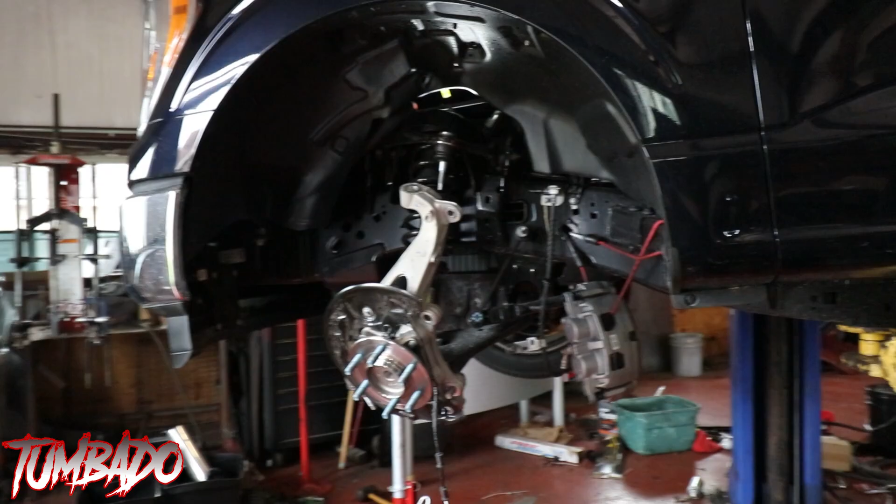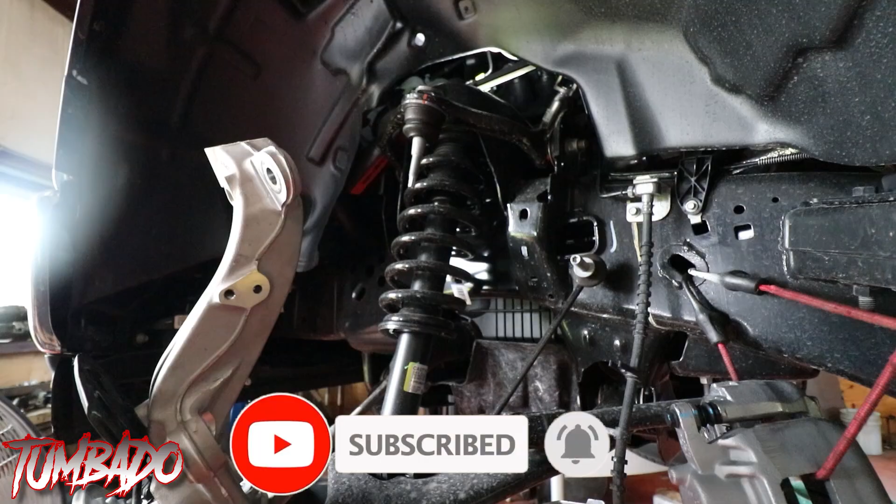So we started working on the front already, started tearing some of the stuff apart. I don't have any of the parts on here just yet, but just a quick reference on these newer style Fords: we have your spindle and hub, bottom ball joint, upper ball joint, stock spring, stock strut, upper control arm, lower control arm.

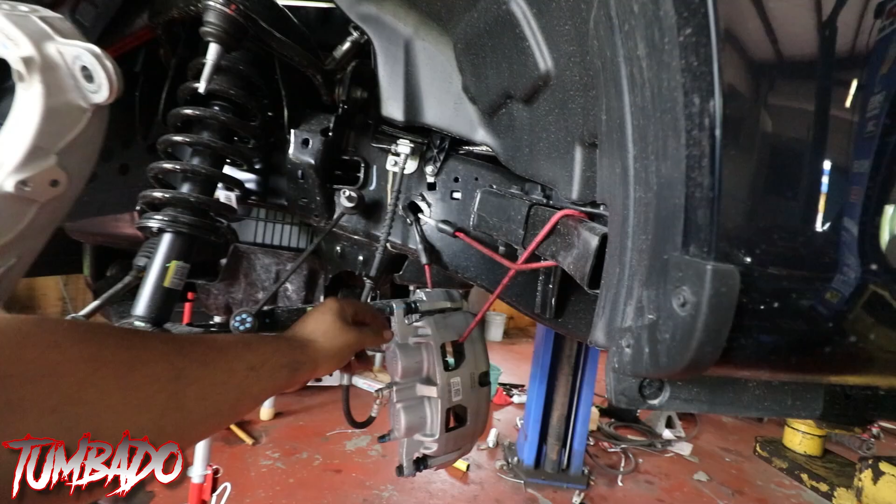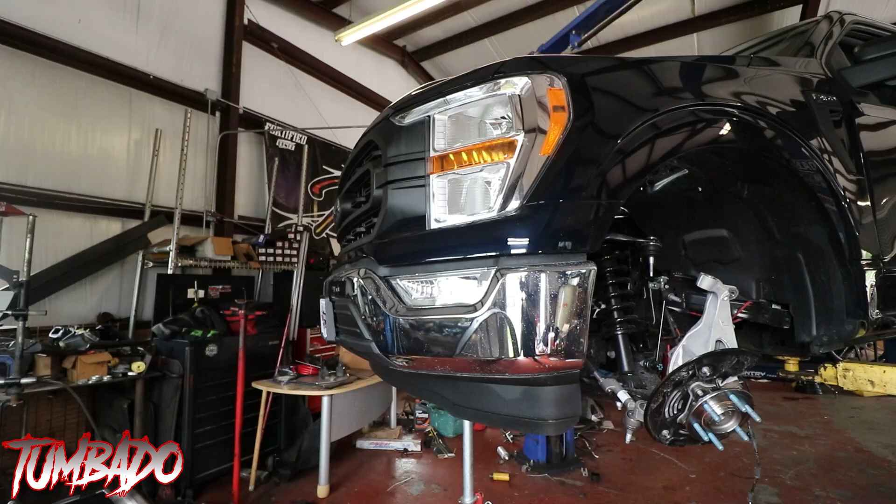I'm going to show you guys what it's consisting of, so you guys can get an idea of when you order that kit. So this is pretty much what the upper and lower control arms look like from the NS kit. We have your driver side, passenger side, the ball joints, the fittings and hardware for the ball joints, and Loctite as well.

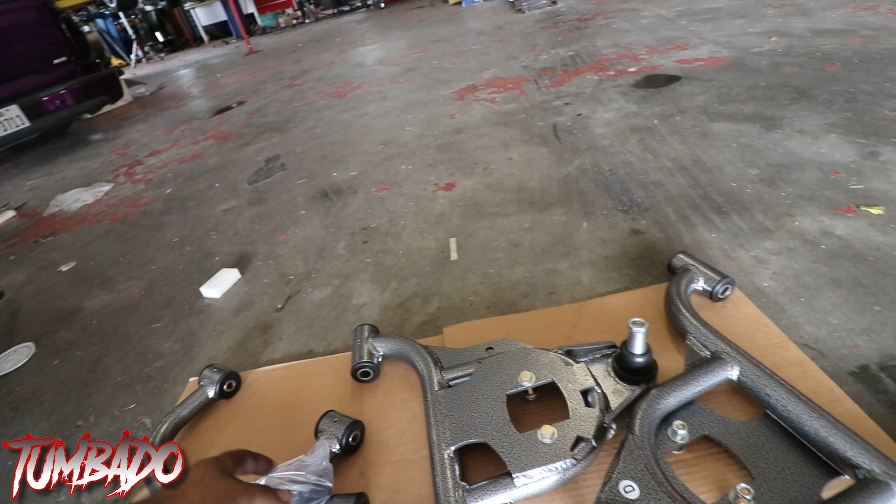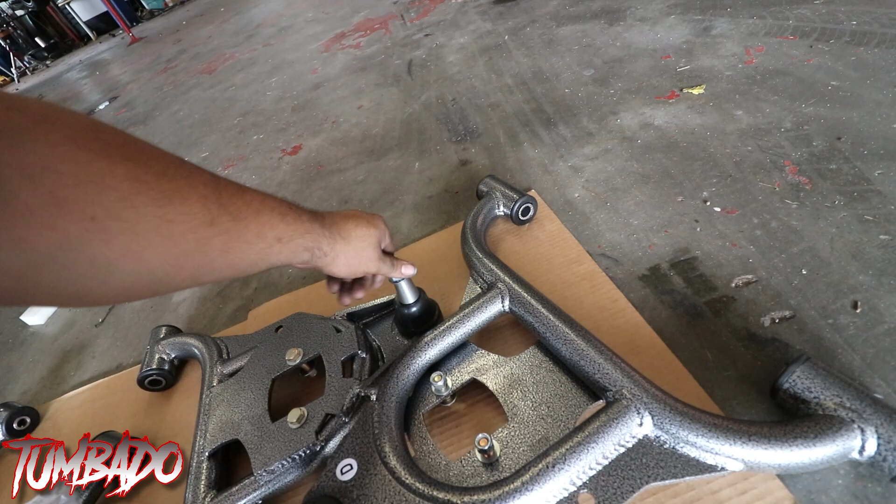Then we have the lowers, has this hardware already as well, bushings, the nuts and all that stuff, and the alignment spacers as well. They pretty much thought of everything to make it fit so that the spindle, when it sits inside the sleeve, doesn't have any kind of wibble wobble or anything like that.

So it's looking pretty good, guys. Honestly, this would be the first time that we installed the NS kit on the Fords. We've done pretty much most NS kits on Chevys and Dodge, but never on a Ford.

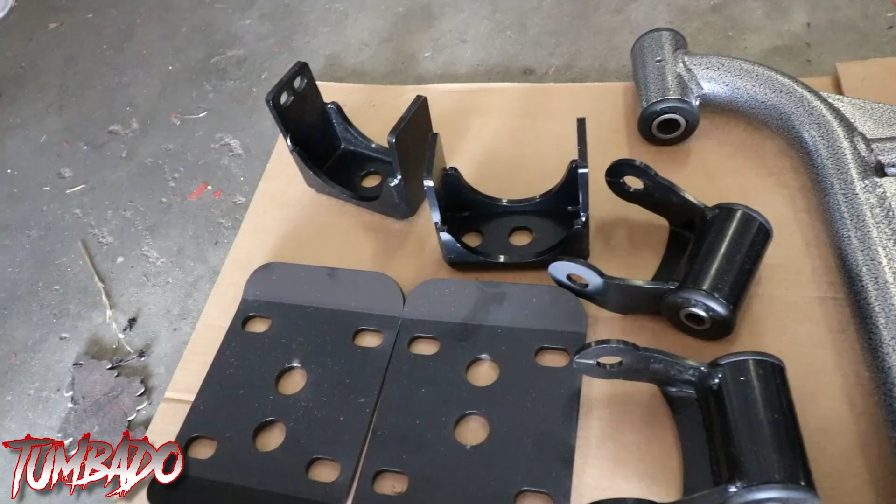Alright, so here we got the back kit, which is consisting of a flip kit, the bottom plates. These trucks do have round U-bolts, so you're not going to need the top plate with the square U-bolt, and the lift shackles to pick it back up.

You notice right here there's this little crease on this piece right here. More than likely that's there to kind of clear a shock bracket or shock bolt. So that's pretty much why that has that on there, but it's looking good.

Let's get this kit installed and see how it ends up coming out. So the first thing I normally like to do is pretty much take the sway bar links off and take the brake calipers, bottom ball joint, top ball joint bolts off.

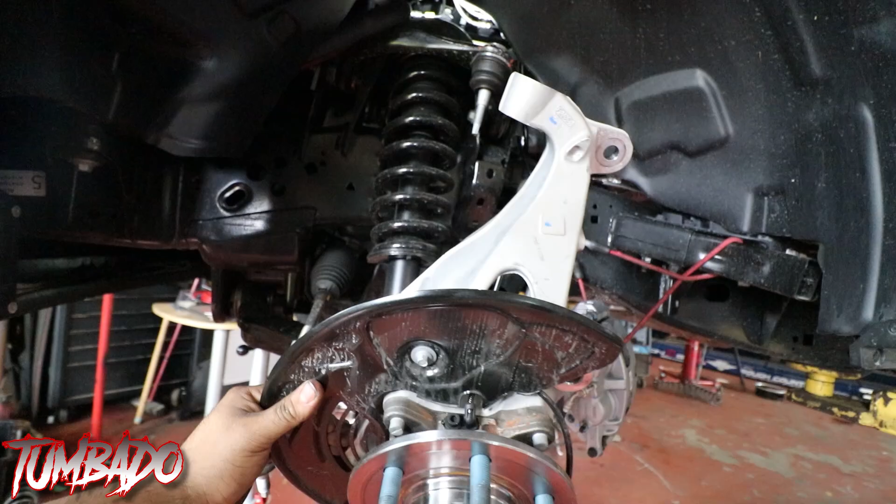First thing is always taking off this tie rod. Then you're able to swing the spindle left to right. Then you pull off the sway bar because it's attached to here. Then you pull off the bolt from here, and then the brake caliper bolts as well after that.

And then you're pretty much already set up to where I'm at. Very easy, very simple. It does have a 10mm here holding the wires. You do have to unplug some of the stuff that's very far back here.

That's why my light is all the way back here, but that's pretty much the nitty-gritty stuff, just to get the wires out of the way as well, because this is all the way tucked up inside there. But once you pull all that stuff off, it's a lot easier.

Now all I have to do is first we'll unbolt the bottom control arm from there, from those 2 points on the frame. And then once we have them unbolted from there, we start unbolting these from the bottom, and then that'll allow for the control arm to fall in place freely, and you're able to slide it out.

For the upper control arm, you have to get a wrench, or if you have a ratchet wrench, pull those off as well. And then once you have the bolts loose, then you have to pull off the top bolts so that this can come down, and then you slide the bolts out.

And the first thing you'll always put back on will be the upper control arm, so that you're not worrying about putting all this stuff on and then having to take it all apart to slide the bolt back in. But you can see that the bolts are in there, they'll slide in.

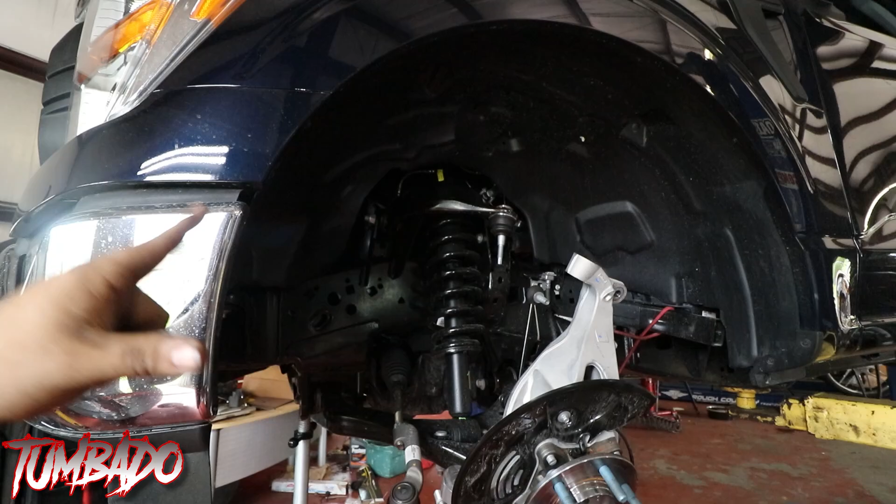But just kind of a quick reference, I'm not going to show you everything I do, but I wanted to show you guys what I normally do, so that you guys have an idea when you want to do it, you're not lost. And if you get lost, you can always come back to this video and see what you have to do. Alright guys, so we got the whole suspension pulled off.

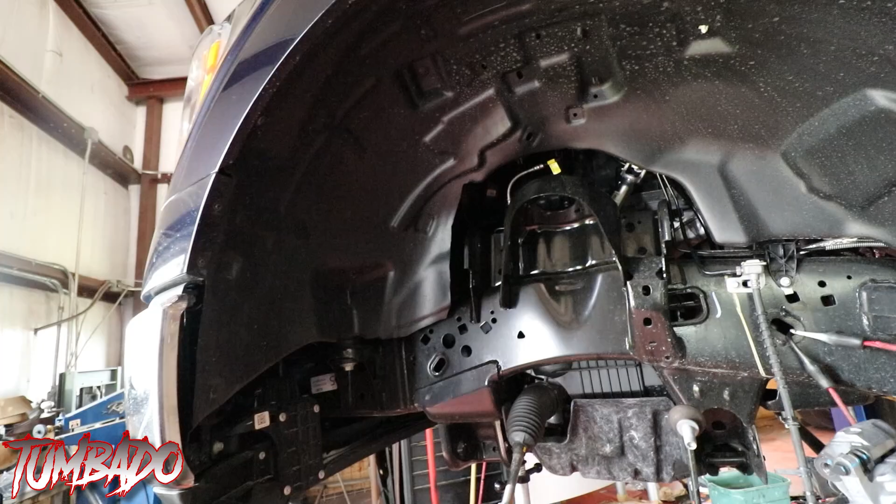No control arms anymore, no strut, nothing. First things first, like I said, we got to put this control arm on there.

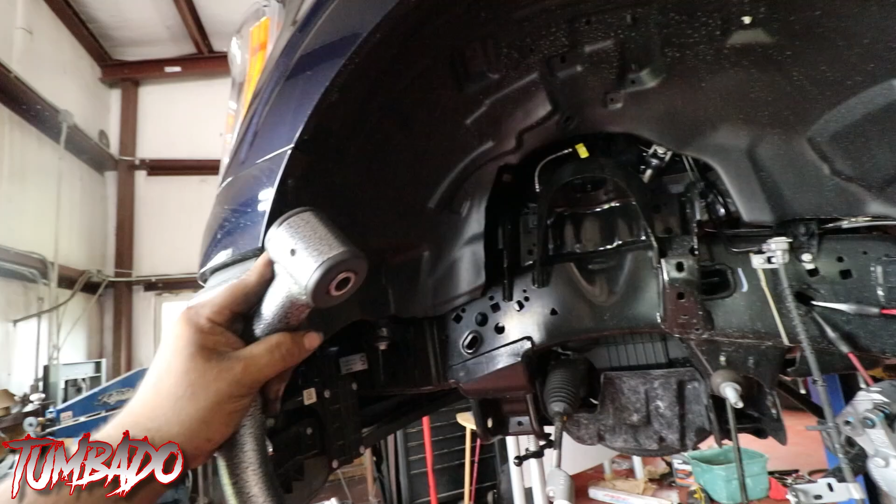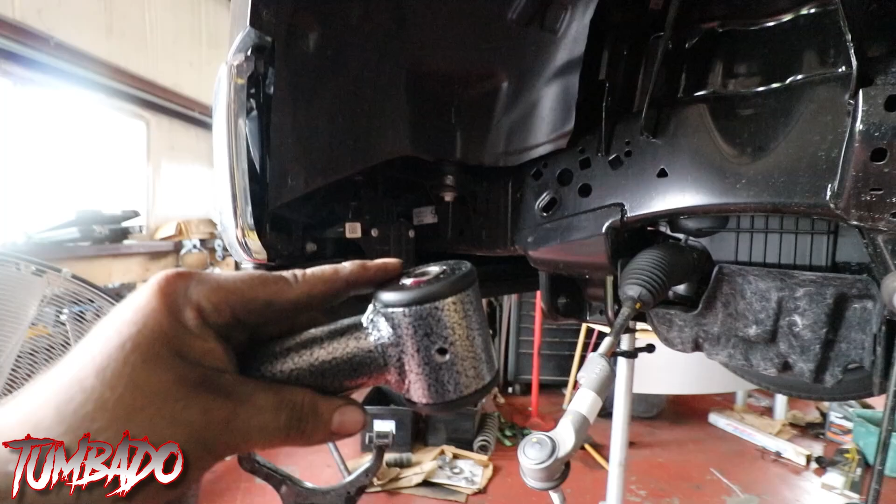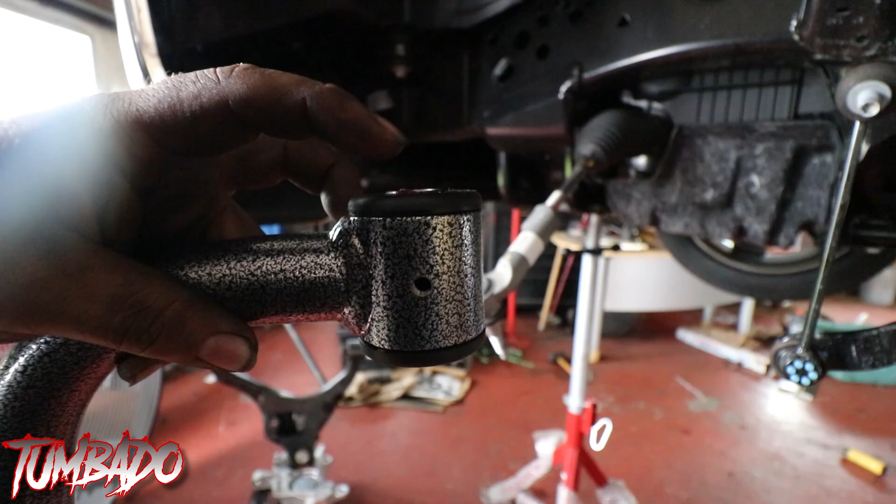You do want to make sure that you add the grease fittings beforehand, so that you're not struggling trying to add them while you have it on the truck. And then as well add grease on the side bushings, just to assure that you're not going to have any kind of squeak or whatever. Most of the time the grease comes out from here, or it goes in through here and comes out through there to lubricate that, but sometimes the grease takes forever to come out that way. So you just want to make sure you grease that up beforehand, so the installation doesn't require grease right away.

But we're gonna throw this on here. Let me just put it all back together and I'll come back when it's just done.

Alright guys, so quick update. We finished this side already and we started on the other side. We got the arms on there, they're looking good. Bottom control arm, tie rod, stuff to do alignment afterwards. Everything's back in place. I double check, make sure everything that we took off is bolted on and tightened up, so that we don't leave anything

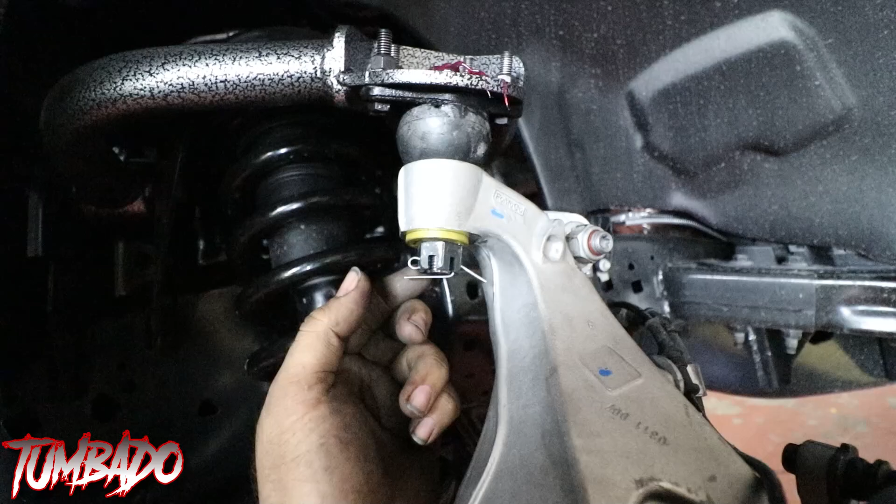astray. So a couple things that I wanted to show you before we move on the video. Now that we have these installed, you want to make sure that you always put this washer that they give you. All this is pretty much doing kind of saving the aluminum from being bit up by the nut, and as well working as a spacer to allow for the cotter pin to go in here in the right position, and that's pretty much gonna make it to where it'll function right.

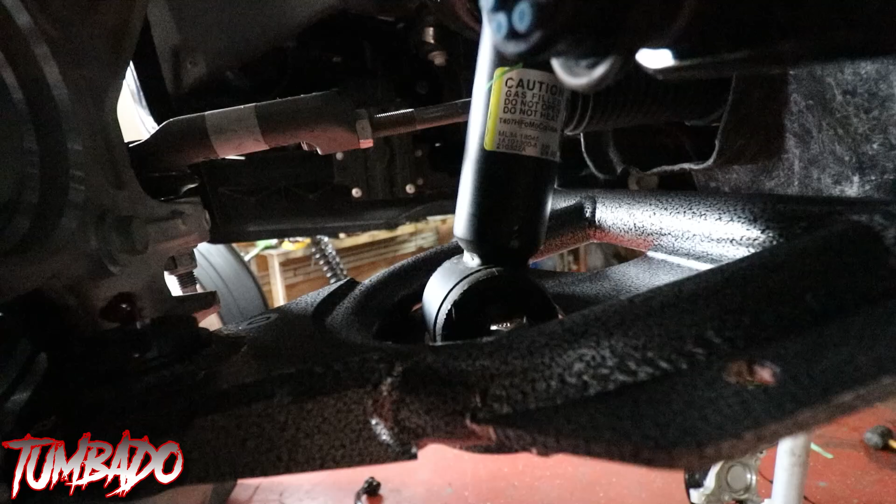Anything else? Okay, so the next thing would be the struts. So the original struts, it has a stud mount. It's gonna be kind of hard to see right here, but they give you the hardware right here, so you push out the studs that it has, the original ones, and then you put their hardware. Once it's on there, it sits pretty nice. It also does come with a sleeve that goes inside of the spindle, and I'll show you that right now on the next side. That's why I kind of just stopped and I was like, let me record before I

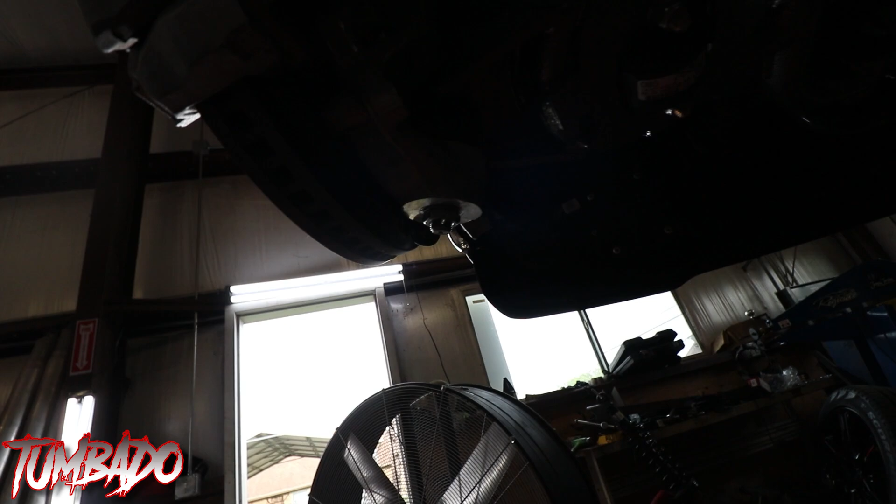forget. And once we have this in here, it does say to put Loctite. Didn't give me a cotter pin, but we're gonna torque this down. Once we torque it down, I'm gonna see if I'm able to put a cotter pin in between, just to kind of keep that on the safe side. And if you have the chance to put the cotter pin in there, that's perfect. It does have a locking washer that kind of stops this from spinning on its own, so that's pretty good. But we still put Loctite as well, just to make sure.

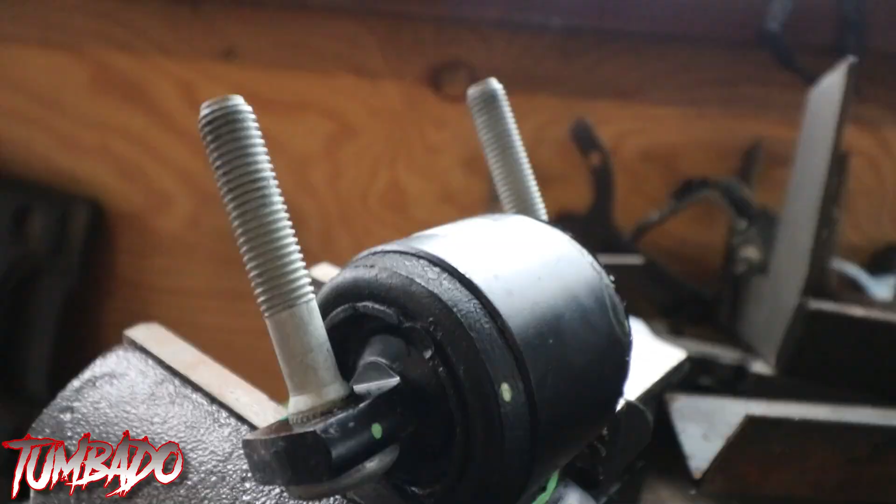But let me show you the rest of the stuff that I was talking about. So this right here is the studs that I was talking about, the original struts on the 2021, which it is a 2021. These have the studs right here, so if you can see that part right there will eventually have to come off. So what we're doing is just pretty much beating this out, so that once it's kicked out like halfway, we're able to just give it a real good swing and it'll come off. And once you have that off, once you put the new hardware, you won't need this at all. So you can scrap that, or you can keep it for later, but you're gonna pretty much beat the ends up anyways. You can always save it by cutting it again and then kind of smoothing it out, and then you're able to put these back on.

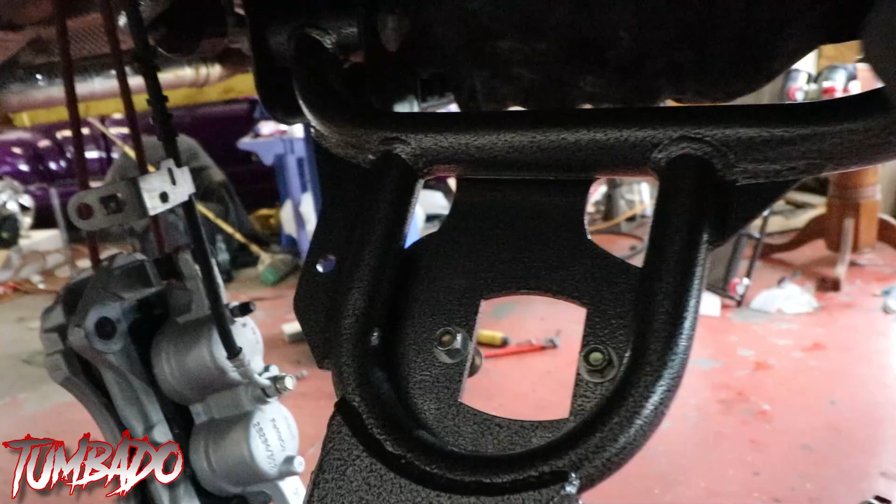But I wouldn't. I would just, if you end up going back to stock, I would just replace it with a new strut. So as you guys can see right here, this right here is not actually a part of the ball joint. This is like an extra sleeve, and you see there's a thread. You have to make sure that you put the thread lock on the whole threads right here, just because you don't know where it's actually going to sit at. But this right here is like some sort of sleeve, and this will actually sit inside the spindle when you pull off that ball joint.

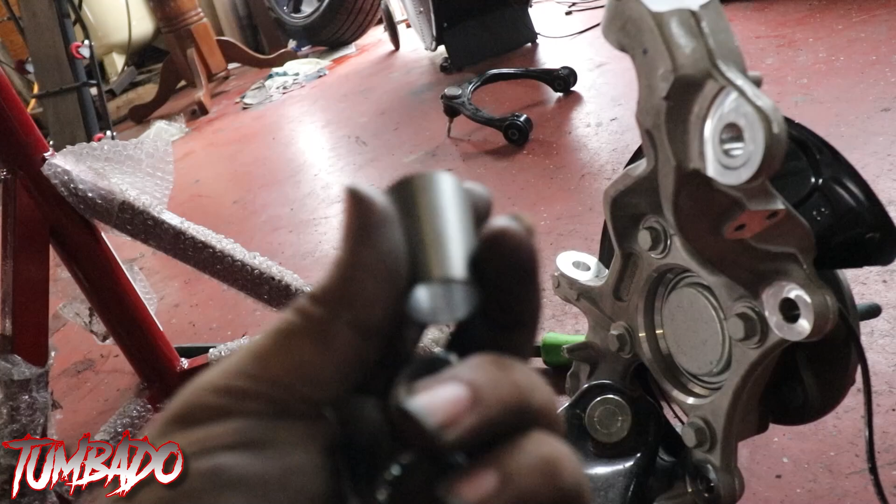The reason why they do this, I'm assuming, is because the ball joint is not big enough on their kit to sit inside that spindle, so they add this sleeve. This sleeve alone will pretty much make up for that extra space it needs, which isn't much, but it's just enough to get the wobble or wiggle out of that ball joint. That's pretty smart. It'll slide right in and taper itself back on there. Once you slide the ball joint in, it sits real nice and tight so it doesn't wiggle at all. You can't even tell this thing is on there, and I don't think it will wear out. More than likely it'll rust out since it looks like mild steel, but I don't think that should be an issue.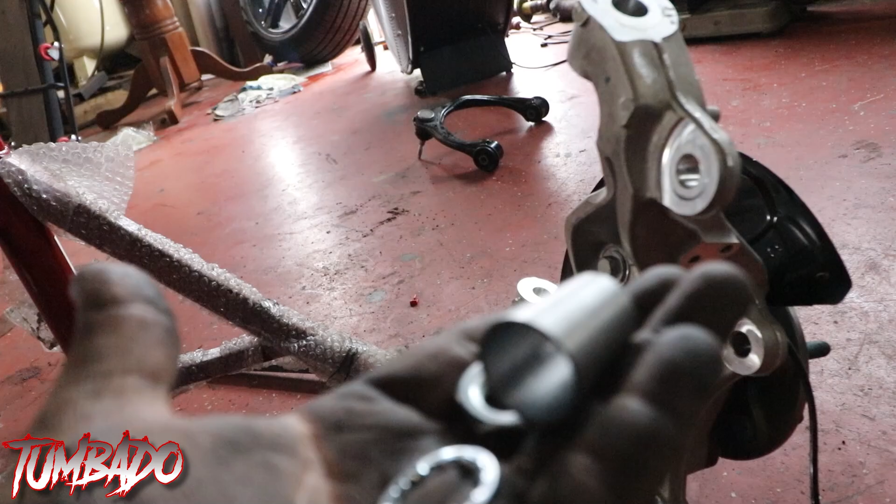So we'll see how this goes. Later on we'll do a future update on the truck and see how everything's performing. We did add Loctite to these bolts and nuts as well, just to keep that on the safe side. We don't add Loctite to the alignment cams or alignment bolts because those end up coming off anyways. But once we put everything back together, we torque it to factory specs and make sure everything is good to go.

Now, another thing before we wrap up the front: there's an alignment cam kit they sell, which includes an offset bolt and offset nut. What that does is allow OEM style alignment.

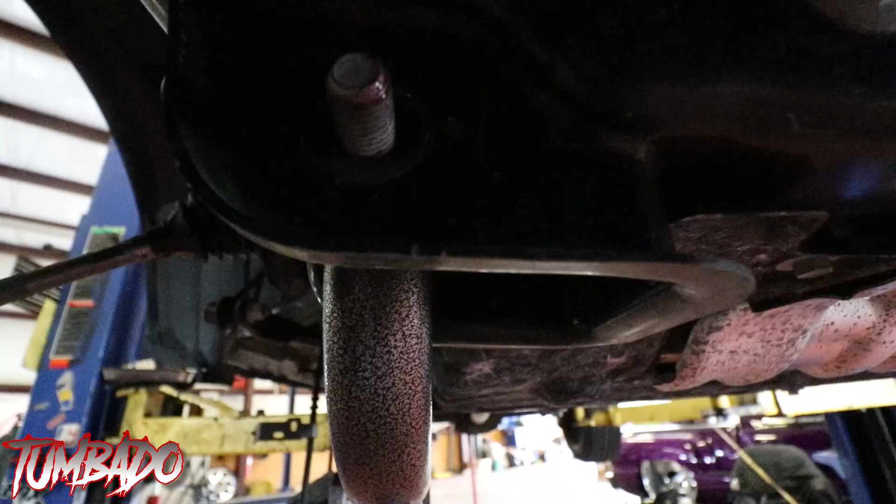If you're looking at this slot, there's a way to go forward and back, but there's nothing locking it in place. Most of the time people say you don't need it, and you don't. But it makes the alignment kind of unsure that it's going to stay in place. Even if you tighten it really good, you can hit a bump and it'll knock it off. It also makes life easier on the alignment guy.

So if you get this kit, make sure you get that lock - the cam bolts or camber kits, whatever you want to call them - because they come with a lock so that when you turn left or right, it actually pushes the control arm forward or back. Right now I'm just doing it manually because he didn't bring me that kit, but if he had, it would have been a lot easier for the alignment.

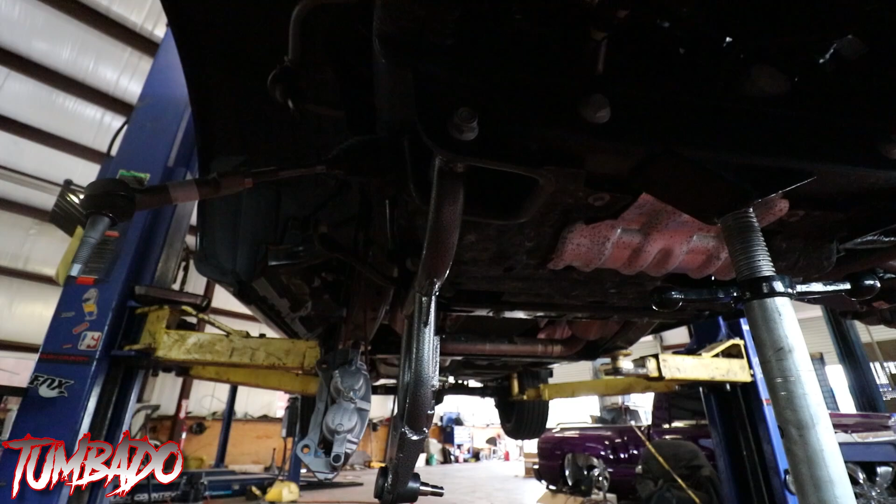But right now we're just kind of winging it until we get it on the machine, and once we get it on the machine, it'll be set and ready to go.

Alright, so we pulled the ball joint off the control arm, which is over there, and now all we have to do is slide this in here like this, and it's pretty much ready to go.

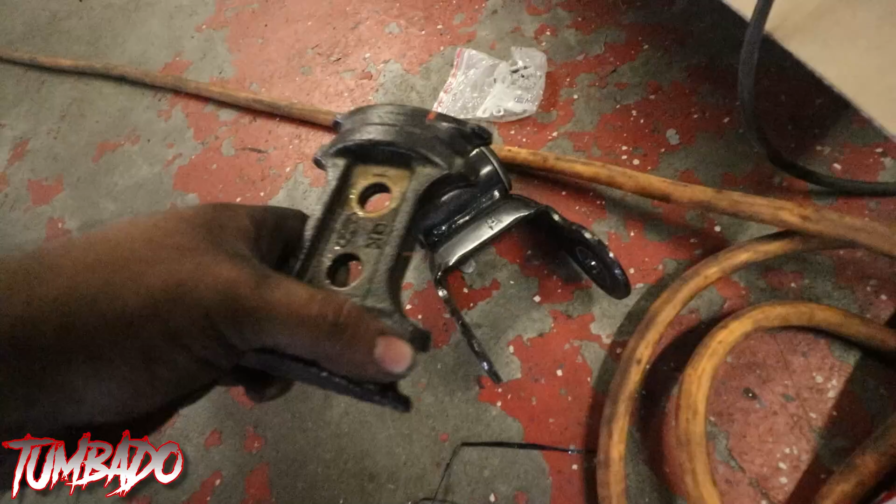Alright guys, so we started working on the back already. This is what we have. These bolts normally come facing up, so we flipped that around. Took off these little brackets it came with - those are the original shackles. Took these off. Took that little shim it had on there off too; it won't need it anymore.

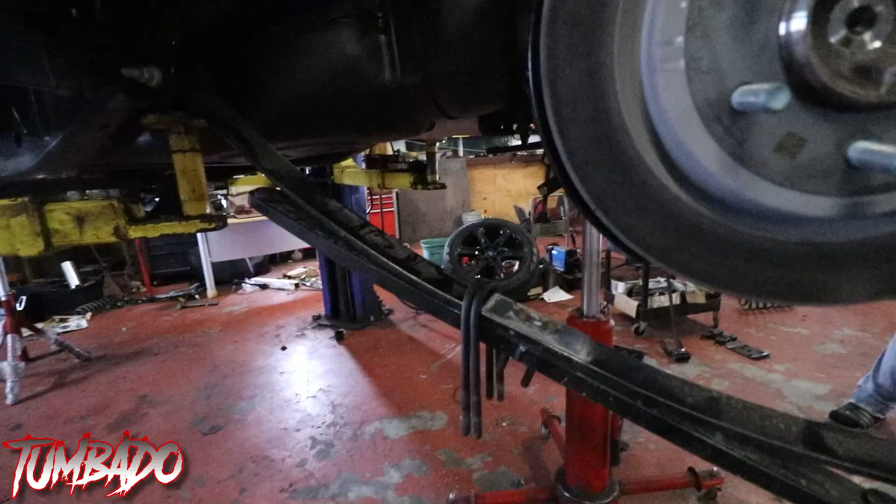So now we got all this stuff flipped around. The leaf springs are underneath the rear end. Threw in the new shackles, added some grease as well. It's looking pretty good. It is pretty late now, but trying to get it done by tonight so tomorrow we just come in and do the alignment.

It's looking pretty good. In this case it's going to use the original U-bolts as well, but normally they come horizontal like that - we're going to make them sit like this now. That's how they're going to sit. Then the flip kit will sit right here, and the bottom plate will sit right here.

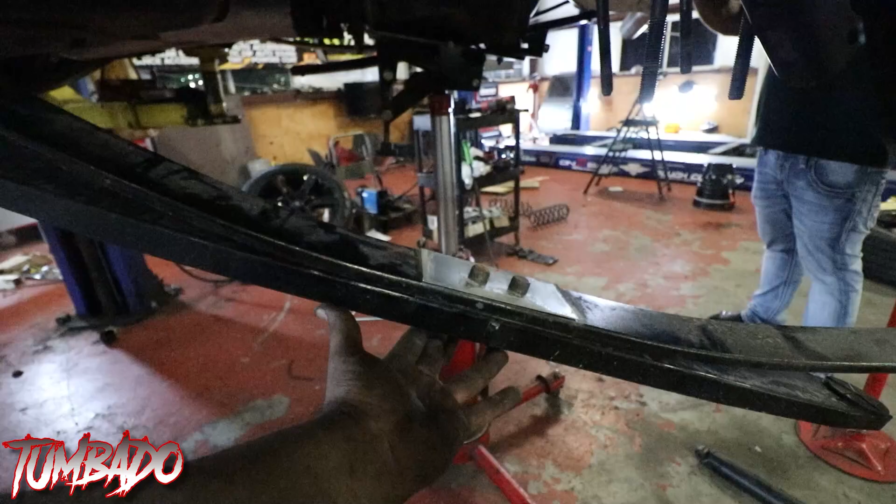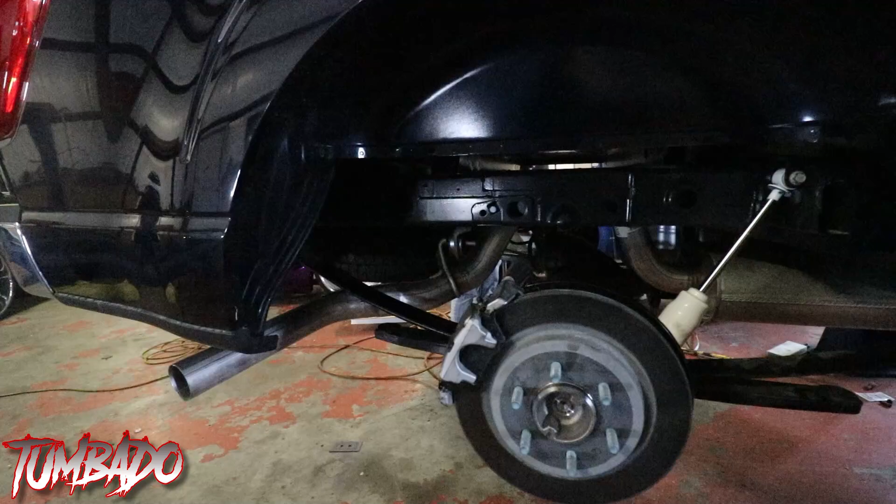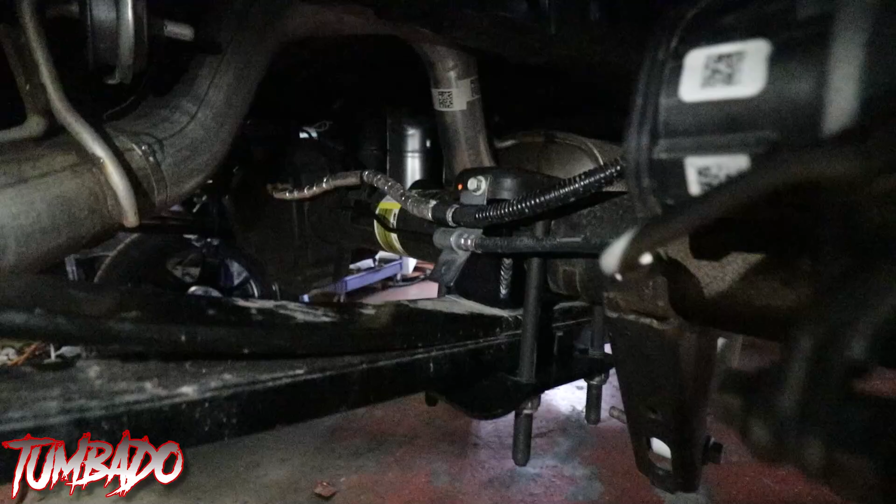Alright guys, so we finished up the back. The drop shock is on there, flip kit is on there. We had a little bit of trouble with the leaf spring stuff, but we got it on there. There was also a big issue with one of the shackles not having the right sleeve, but we got that fixed as well - we just had to retap it and redrill to the right bolt size. But it looks good. Let me see if I can turn on my flash. Yes, I can. Flip kit's on there, U-bolts, shocks, and the shackles back there. Make sure you guys grease up your stuff.